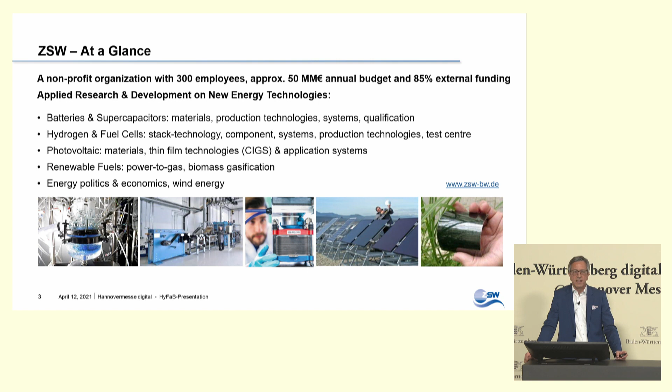Our focus is on batteries and supercapacitors, hydrogen and fuel cells, on photovoltaics, on renewable energy fuels, and also on energy politics and economics, as well as our newest baby on wind energy. If you see all the long list, you may put this together in a way that we really take care for the primary energy generation as well as primary energy conversion and storage. These all are very hot topics today, and they are topics that are changing the way we are living. And therefore, I think it's good that ZSW is taking care of these topics for already 30 years in a row, and therefore we have a great experience dealing and delivering great results.

The ZSW, as I mentioned, is an institute founded by the state of Baden-Württemberg. Therefore, by definition, our sites are within Baden-Württemberg. Our headquarters is in Stuttgart, that you can see on the upper left-hand side. It holds our research on photovoltaics, energy politics, energy carriers, and our central divisions. We have a test platform for solar panels on the Schwäbische Alb, and we have two locations in Ulm. Ulm is at the border to Bavaria and is southeast of Baden-Württemberg.

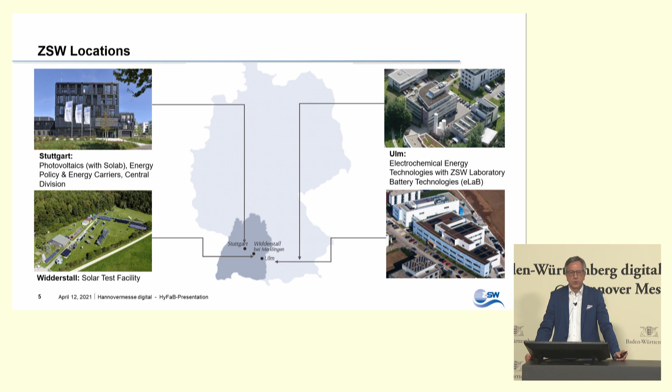On the upper end, you see basically our initial building, the building the ZSW had grown from, dealing today with hydrogen and fuel cells. And then the right-hand side at the bottom, you see the so-called E-Lab, where we are running our battery activities. Ulm is a rather small city, maybe 120,000 population, the bigger area 200,000. So you may consider Ulm as being too small for the topics we are dealing with, but that's not true, because Ulm is really one of the global centers of electrochemistry.

Within the Ulm Science Park, we have 4 institutes dealing with electrochemistry. That's the University of Ulm, with fundamental electrochemistry. That is the Helmholtz Institute, with a big focus on battery development and battery components design. We have the ZSW being responsible for technology development, prototyping, and transfer into the market. And we have the THU there, more dealing with the electronic part of the fuel cells, of batteries, of energy conversion and storage. This altogether is roughly 400 plus scientists dealing with electrochemical topics. And there are not so many centers of electrochemistry on a global basis compared to what we have available in Ulm, basically within a 10-minute walking distance.

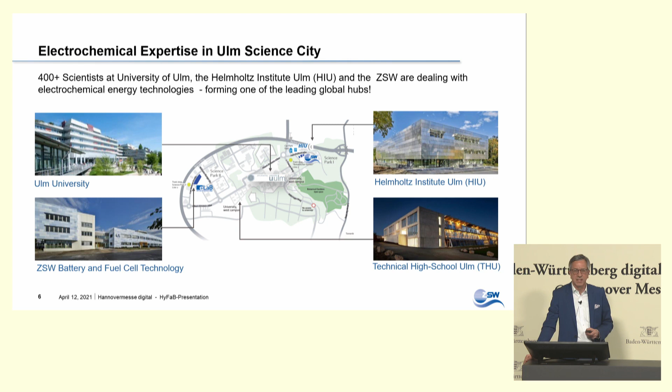What are we doing in fuel cells? Basically, we are doing everything from cradle to grave, but of course we have some certain focus areas because the system is so complex that nobody can really cover the whole wide span of fuel cells. We are working on materials, for instance, electrocatalysts. We are not doing membrane development. We are typically buying membranes, but we're doing MEA. We're typically buying GDL. We have some development there.

We are doing bipolar plate components, but we're doing a lot in the stack design and stack construction, stack building, including a lot of modeling, design, and prototyping, as you will see later on. And with our newest baby, the HyFab, we also will move into the stack production that is lagging at the moment. We do battery production on a pilot scale, but we don't do stack production for fuel cells right now.

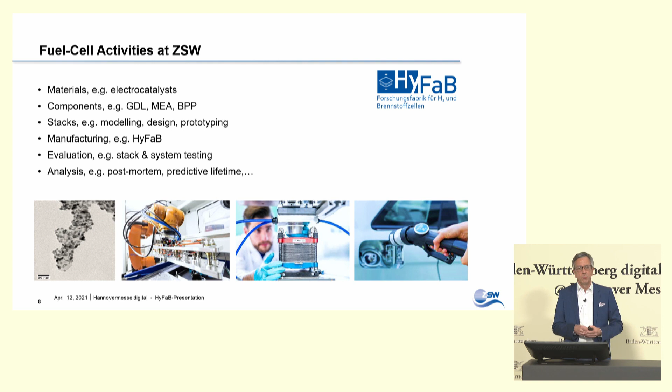And we have a bunch of data, and a bunch means quite a lot of data, from over 30 years of measuring fuel cells that we are now using together with machine learning routines for a kind of predictive lifetime and predictive maintenance development for fuel cells. We also have, and that's very important, in parallel, a lot of hydrogen activities. You only can operate fuel cells if you understand hydrogen.

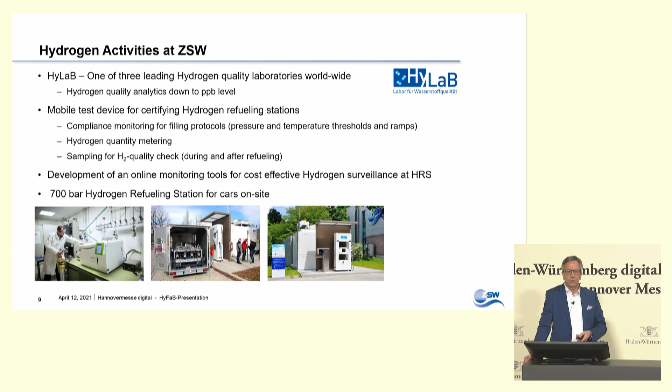And we also have a mobile test device for certifying hydrogen refueling stations. It's basically a trailer that you see in the bottom center picture, which we are trailing around the whole of Europe, and we're basically evaluating and checking the quality and the refueling standards of refueling stations. We also have a 700-bar refueling station on site where we can really monitor firsthand what's going on. And it gives you an idea that we are not just focusing on fuel cells, but also taking into account the whole hydrogen infrastructure.

But now let's focus on what HyFab is. HyFab should support the German industry in growing the fuel cell from something that is manufactured, that is handmade, into a mass product. We have a clear focus on the PEM fuel cell. We are not looking into other types of fuel cells. And we're looking mainly into the components, into the assembly, into end-of-line testing and the commissioning.

We want to create and evaluate quality procedures and testing protocols as well as standards. Most important, we want to generate an industry know-how. In Germany, we call it Branchenwissen. This exists in the meantime for batteries, but it's not so well known what the key criteria are for fuel cells. What are people talking about when they talk fuel cells? These are things we want to create and generate.

It should be an entry platform for newcomers, especially for small and mid-sized enterprises who want to check if this could be a market and an industry they want to go into and what is really needed and necessary. We want to link and create new supply chains with new players, and we want to educate and train specialists, but also the general public. So that's the idea of the HyFab project.

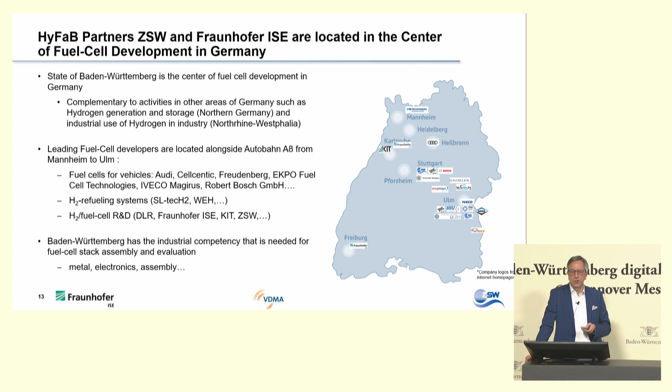I think it's pretty nice because the core competency of Fraunhofer ISE for many, many years is on MEA development, whereas in Ulm it's more on stack development.

You see a bit of the tasks we have here, basically looking into the manufacturing processes and process stability. What environment do we need? Do we need a dry room? Do we need a clean room? What level of clean room do we need? What is the quality check we have to do, the end-of-line factory acceptance test? How much time do we have to do it? Right now it's multi-hour testing, 8 to 10 hours. This has to come down to below 1 hour.

These are all topics we are looking into. So there's a lot of work you can see here that will keep us busy over the next years.

Again, all this will happen together with industry partners. The machinery we will use will come from industry partners—it's not homemade, it's not self-invented. It's machinery that is used in the market, and we will take it into our labs to investigate the processes and do the kind of work that industry just doesn't have time for, because industry is now in a rush to bring the fuel cell from a handmade system into a mass production system. There's so much work that has to run in parallel, and we will take care of part of this work in the HyFab project.

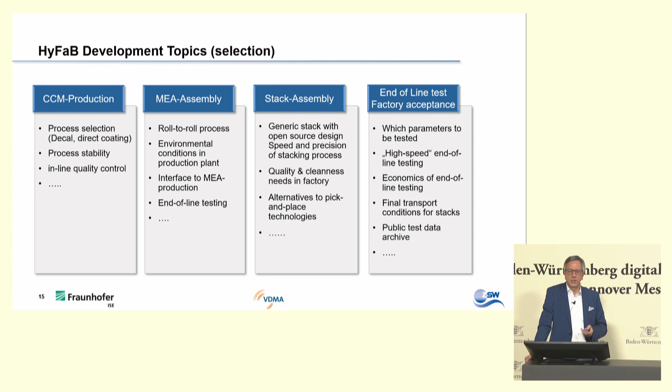Let's now focus on what's going on in the HyFab in Ulm. I mentioned already the groundbreaking in February, maybe the coldest day with a snowstorm we had this year. However, what we see here is what we will get out of the groundbreaking within the next 12 months.

It's basically a gas farm on the right-hand side to store all the necessary gases, especially hydrogen, of course. A big hall for testing fuel cells, and a central building for offices and for basically all the technical systems that you need to provide electricity, gases, and safety requirements for doing all the fuel cell testing. This building can hold, at the end of the day, roughly 50 test benches for fuel cells.

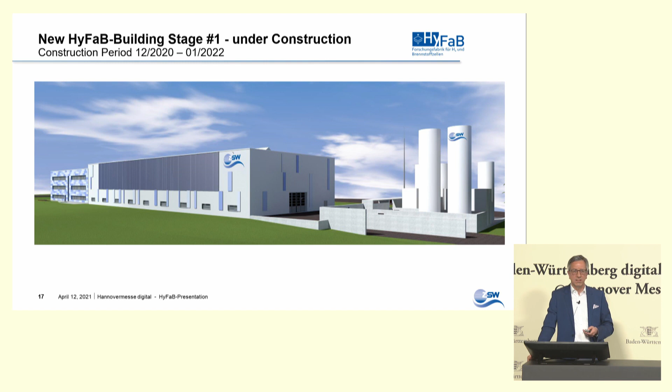This is a picture from last week where you see the construction as it is right now. The front part is the construction going on. It's still on the ground level, but with these pre-manufactured pieces, we will see big progress over the next weeks and months. You can follow our live webcam on the ZSW homepage to see what's going on. Behind are the buildings of the ZSW as they are today.

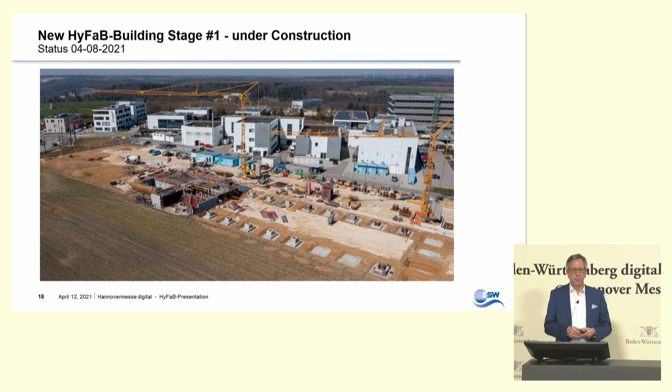The whole building complex, after being finished in 18 months, will look like that. We had already seen the gas storage—just to give you an idea, up to 2.5 million norm cubic meters of hydrogen can be managed per year. We have the testing hall there with two stories, and we have the central building with the offices.

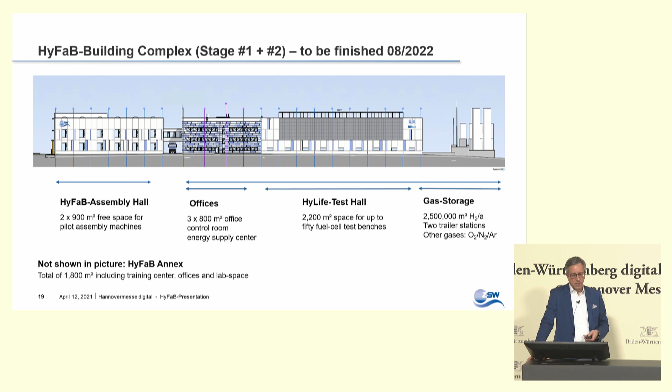On the left-hand side, we will see another construction starting most likely August or September this year. This is the real HyFab assembly hall, a building where the machinery will get into really manufacturing the fuel cells. Not shown here, but shown on the next picture, is a building perpendicular on the left-hand side to the HyFab assembly hall—this is an Annex building, where we will build a big seminar area for our training. You see it on the ground floor here.

We have additional offices and lab on the first and second floor, directly connected to the manufacturing area, and again directly connected to the testing area. So you see it's an impressive building complex that we will put there within 18 months. And this will allow us to give an environment that we need to really run this project full speed.

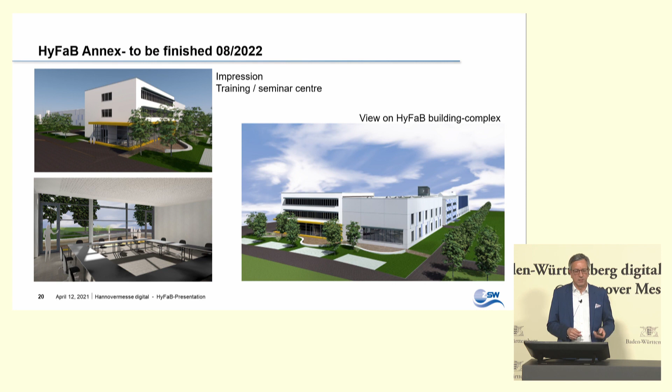I mentioned already one very important piece of this development is a so-called generic stack. It's an open and modular stack design that ZSW has developed together with the VFF. It allows a stack power up to 150 kilowatt. It allows power densities up to 5 kilowatt per liter.

It's an open source stack that we really can give out of our hands, that people can use without being limited by third-party patents. The stack is designed both with a metallic as well as a graphitic bipolar plate, and it's a seal-on-plate concept for the metallic bipolar plate.

We have a full simulation of that stack available that we can share with basically our partners. And we have a digital twin under development. However, it's important that we are not focusing on a digital twin in the way that maybe differs from many projects that we see today running in the university environment.

We would like to have the hardware. We would like to be able to hand over 100 bipolar plates to a company that is, for instance, working right now already in forming metals, so that they can see what it means having a bipolar plate for fuel cells. We want to discuss with different companies in the field of sealing technologies, because there are so many sealing technologies available, so we need a bipolar plate without a seal to test out different sealing technologies. That's all basically done with the hardware of the generic stack.

And therefore we think it's very important to have it. The stack is, as I mentioned, fully designed. We had already been sourcing out some development packages to development partners.

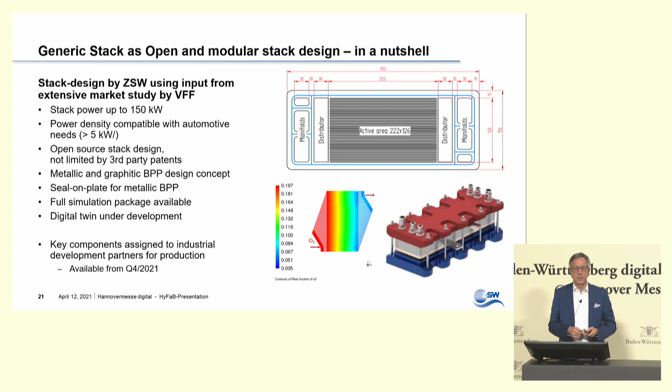The whole generic stack is based on the extensive expertise in simulation that we have at ZSW. So the flow field is really simulated in any detail from ZSW, knowing what is possible in the industry, but still in the final stage in close cooperation with an industry partner, because only industry can really give us the latest insights - what is possible, how thin can the bipolar plate become, how thin can the film become, what curvature is possible for the channels.

But everything else is fully modeled, and we basically can hand over the modeling package also to other companies who are interested in entering, for instance, the field of metallic bipolar plates. So I think it's very important that you know that, because it's important that this is an open platform.

There's no exclusivity in the HyFab. The HyFab basically can take orders from industry. There will be later on an industrial advisory board that will kind of take the orders, will discuss the orders, and then will release the interest and the orders from industry into the research and development organizations, both at Fraunhofer ISE in Freiburg, as well as ZSW in Ulm, all together into a joint project.

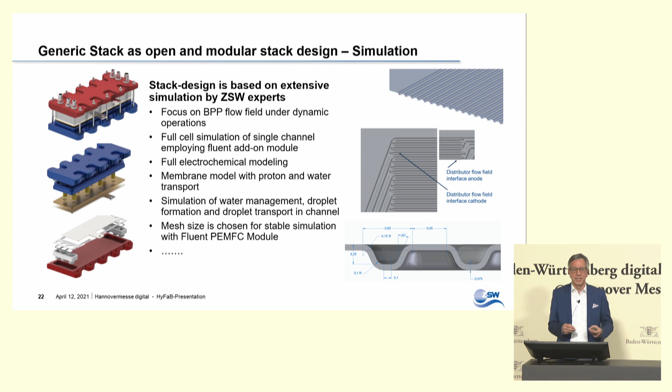And then we will, with our expertise in development, try to solve the problem together with industry. Nothing will happen without the input and the close cooperation with industry. And again, we think that's the most important thing in the HyFab project, and maybe also one of the most important differentiators to other projects that are now mushrooming everywhere, dealing also with the development of fuel cells.

So that also brings me a little bit to the summary, a little bit ahead of time, but it's maybe the right direction. So the HyFab is, as I have shown you, a joint project of ZSW, Fraunhofer ISE, and the VDMA, the Association of the Mechanical Engineers in Germany. It should support the ramp-up of fuel cell stack production.

So we are really focusing on the fuel cell stack because that's the key component. It's the most expensive one, the most difficult one. We are not looking into balance of plant components.

Of course, we need them to run our systems, but we have access to them, and both Fraunhofer ISE and ZSW are very experienced in running full-fledged test benches for fuel cells. But the focus is really the fuel cell stack. There might be other centers coming up in Germany later dealing with hydrogen technology, starting from generation, storage, fueling, and the system around, but we can really concentrate now on the fuel cell stack.

Technology input from industry, using today's material and components to develop processes for tomorrow. I stressed this point already twice, but I would like to do it a third time.

I would like to take an analogy to batteries. If you look into lithium-ion battery, an extremely successful technology today, and look back into the invention of the batteries and the Nobel Prizes being awarded, the materials and technology for which the Nobel Prize was awarded was basically what Sony brought into the market 30 years ago. The lithium-ion battery has not changed much in terms of materials employed for the first 10 years.

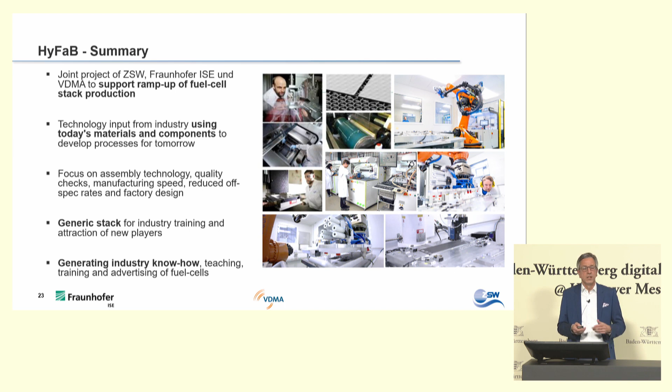By doing that, we want to generate industry know-how, we want to train experts, we want to train new players, and we want to train the publicity and the public around the fact that a fuel cell is something you will really see in the mass market in the future.

And I think that's for today. Thank you very much for your attention. Again, thank you very much to the people giving the money here. We have a high responsibility with the money, and we will use it in the best way. We are believing in fuel cells, and we hope to make it happen. Thank you very much.